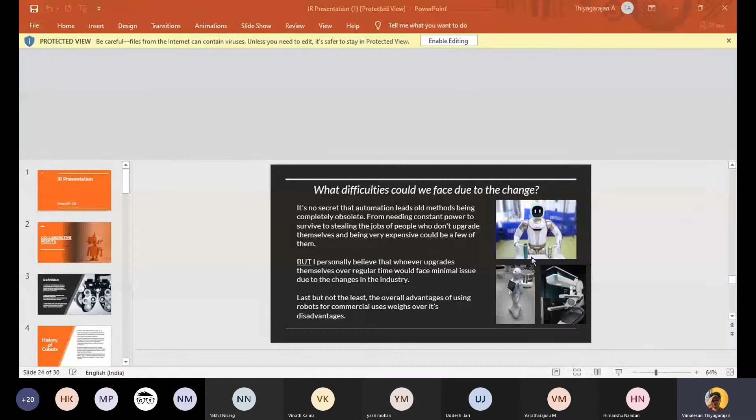Yes, Vimalesan. Give enable editing and then give your file.

Good morning, sir, and my dear friends. We are Group Wealth. We are presenting upon robot technologies and applications, and the topics we selected are as follows.

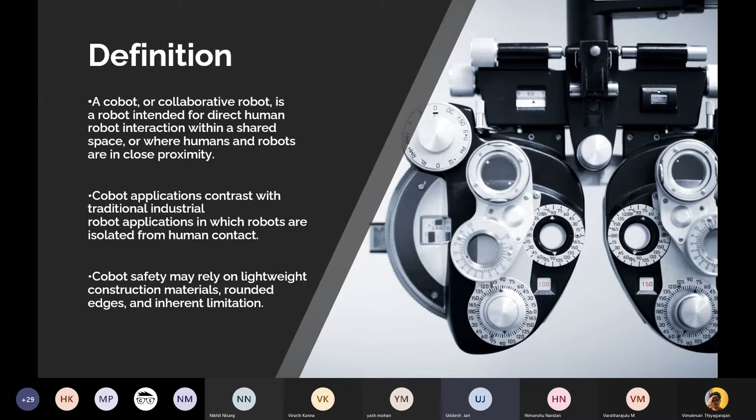Next slide, history of cobots. Cobots were invented in 1996 by J. Edward Colgate and Michael Peshkin, professors at Northwestern University. Their 1997 US patent entitled 'Cobots' described an apparatus and method for direct physical interaction between a person and a general purpose manipulator controlled by a computer.

The invention resulted from a 1994 General Motors initiative led by Prasad Akella of the GM Robotics Center, and a 1995 General Motors Foundation research grant intended to find a way to make robots or robot-like equipment safe enough to team with people.

There are four types of collaboration possible between robots and humans in industrial settings. The International Federation of Robotics defines four levels of collaboration between them. First, coexistence: human and robot work alongside each other without a fence but with no shared workspace.

Second, sequential collaboration: human and robot are active in a shared workspace but their motions are sequential, they do not work on a part at the same time. Third, cooperation: robot and human work on the same part at the same time, with both in motion simultaneously. Fourth, responsive collaboration: the robot responds in real time to the movement of human workers.

Next slide. Now coming to the applications of collaborative robots, I have taken two fields and a third as other applications. The first field is medical, with four broad applications: radiation surgery, angiography, hippotherapy, and particle therapy. In the entertainment field we have riding systems, 9D movies, motion pictures, and direction based on cobots. Other applications include biological cybernetic research, wearable robots, and military cobots.

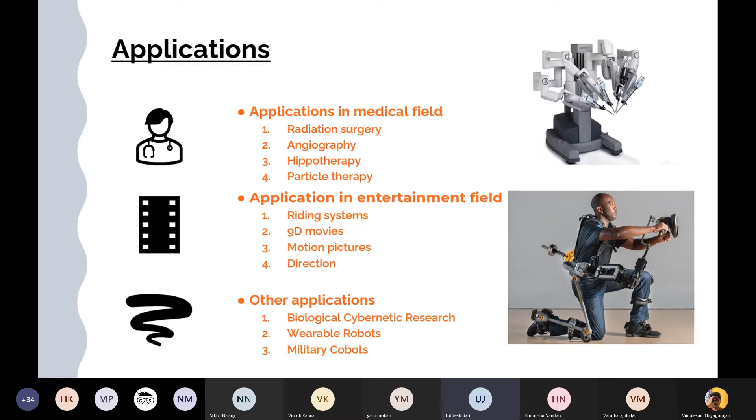Coming to its advantages and disadvantages. Advantages of cobots: they are more adaptable, they can adapt anywhere, they are more productive, giving more output in the same amount of time. Cobots are safer, more intuitive, more user friendly and intelligent, and most importantly, more affordable and cost friendly. Cobots have the ability to work around the clock, handling heavy loads, toxic substances, and repetitive tasks continuously.

Now coming to disadvantages: high standards of maintenance are required. Second, precise programming is needed, requiring extensive time, training, and specialty knowledge. When the computer fails, it causes a breakdown. Fourth, new products require reprogramming, which takes a lot of time. Fifth, people lose jobs because they are replaced by robots in the new era. Sixth, there are supply of power issues. Thank you.

I would hand over to Vimalesan to talk about self-healing robots.

Oh, Vimalesan, you're mute. Vimal. Am I audible now? Yeah, you are on. Yes, yes, I think it's echoing. Okay.

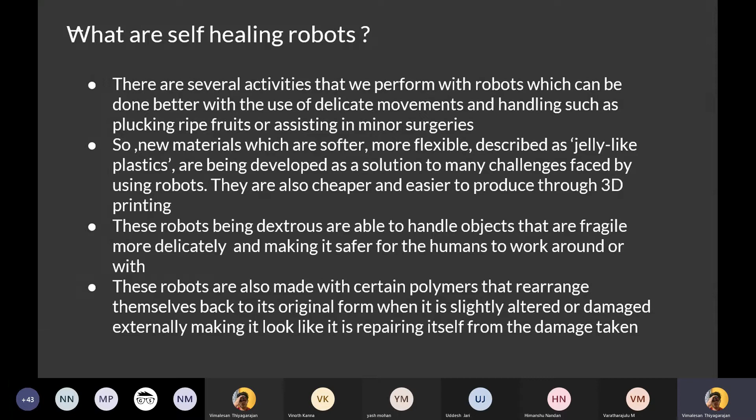So why should we use these robots? First, they help reduce the need for time-consuming, complex, and expensive repairs because they heal themselves, and even if there is damage, it's easy to fix them through 3D printing. This also has implications for sustainability since you don't need to replace many parts, and maintenance is independent and autonomous. Self-repair mechanisms also mean they are less prone to human risk, that is, humans damaging them, because you don't have to worry about accidents in the workplace.

They are also extremely safe in workplaces with many robot workers and human workers. By developing more of these soft, safe materials, they can sense and locate damage and trigger the healing process without human interference. This is traditionally found in factories and labs, and will soon be moving towards environments like agriculture and the average household.

Xenobots are a type of self-healing robot that is recently being made. They are made with the help of stem cells taken from a frog. These are less than a millimeter wide, and they can travel inside our bodies like our blood vessels, and they can also walk and swim. In the top right, you can see an example. These have their own mass of cells that function on their own, and they also heal.

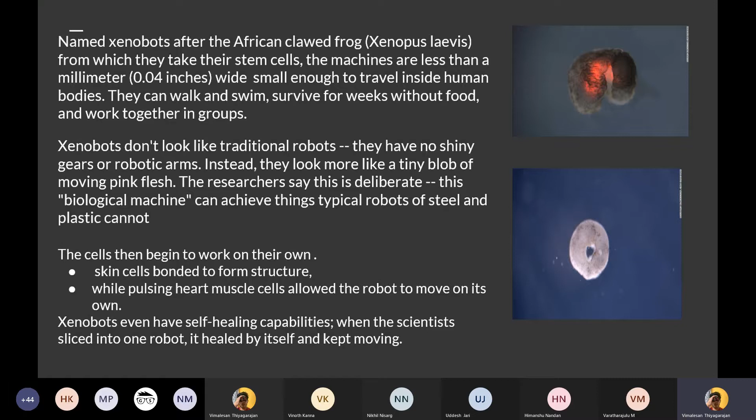These also have self-healing capabilities, in that when scientists cut the robot, it kept healing itself and moving. With this, my topic is over.

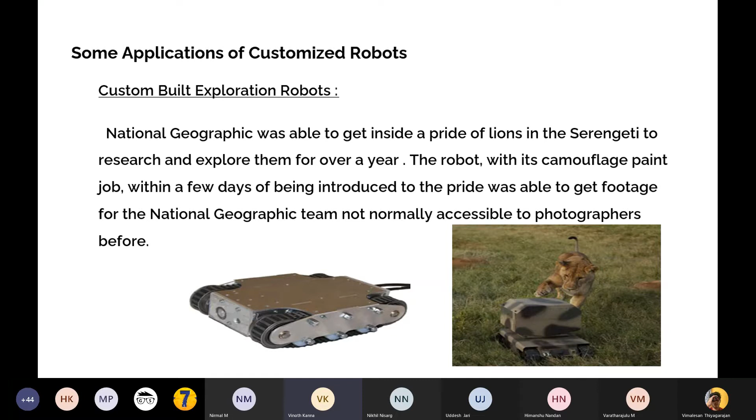Here's an application of customized robots: a custom-built exploration robot. National Geographic was able to get inside a pride of lions in the Serengeti to research and explore them for over a year. The robot, with its camouflage paint job, within a few days of being introduced to a pride, was able to get footage for the National Geographic team not normally accessible to photographers before. Next slide.

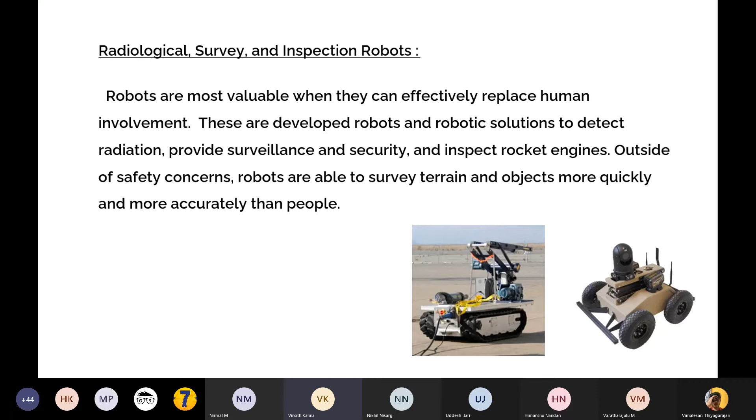Next, radiological survey and inspection robots. Robots are most valuable when they can effectively replace human involvement. These developed robots and robotic solutions detect radiation, provide surveillance and security, and inspect rocket engines. Outside of safety concerns, robots are able to survey terrain and other objects more quickly and accurately than people. Next slide.

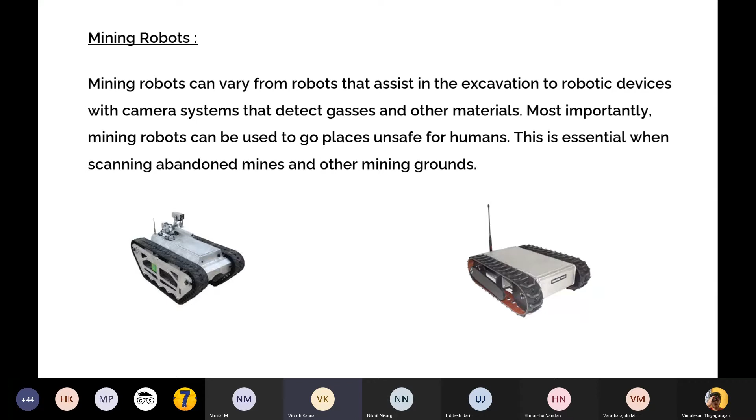Mining robots vary from robots that assist in excavation to robotic devices with camera systems that detect gases and other materials. Most importantly, mining robots can be used to go places unsafe for humans. This is essential when scanning abandoned mines and other mining grounds.

Next, the last application is public safety and homeland security. Standard tactical surveillance robots are routinely used by police, fire, security, SWAT, HAZMAT, etc.. We can customize these robots to suit specific needs if we require a special manipulator, HAZMAT sensor, size, weight, or any other feature — it can be specialized through customization. Thank you, sir, over to the next speaker.

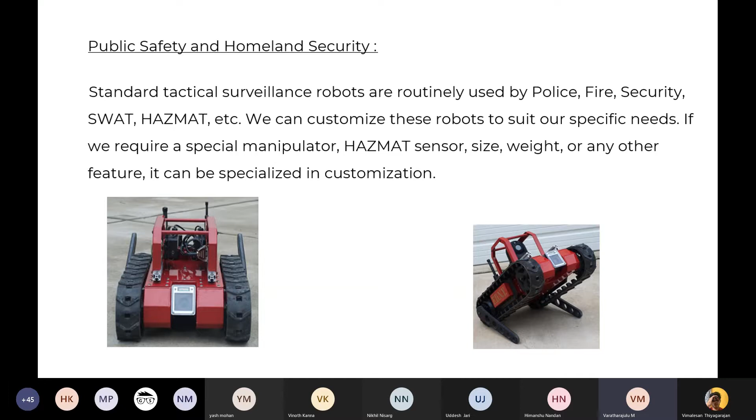Yes sir, so my topic is commercial robots. Can you go to the next slide, please?

As the name suggests, these are used in commercial applications wherever there is buying and selling of goods and services. There are various applications of commercial robots, from being a waiter in a Japanese cafe to being an autonomous guided vehicle. So why are these commercial robots used? Experts say that previously robots were only used in assembly lines, but now they are slowly moving away from assembly lines into our daily lives. With the help of artificial intelligence and automated vision, robots can now work alongside humans in the same workspace.

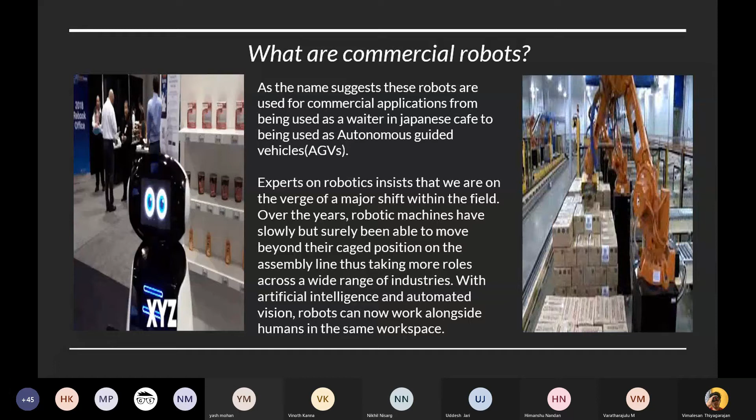Can you go to the next slide, please? So where are commercial robots used? Commercial robots are used in delivering retail products to customers, as we would have heard about the Amazon delivery system which is now using drones. Those are automated drones; they do not need any human interference. It could also be used in mapping activities such as exploring a cave, and perform medical procedures. Right now it's not being used extensively, but in future it's obvious that it will be used a lot more and will help in many ways.

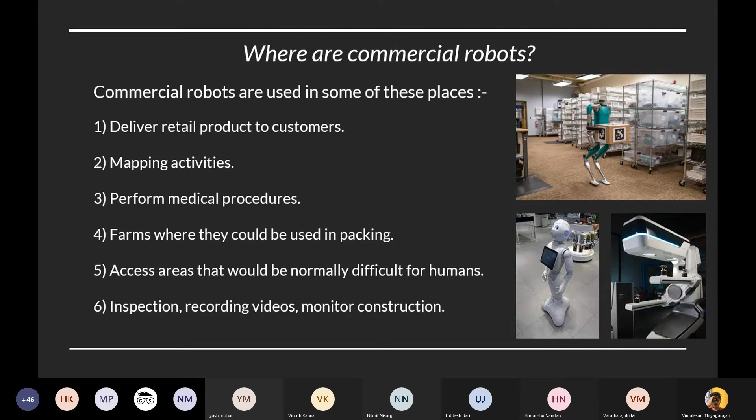It could also be used in packing in farms. If you guys have seen videos on TV or the internet, not in India but other places, it is heavily used and it actually increases productivity by a lot. Even big countries like India cannot compete with small countries like Sweden because of the involvement of commercial robots in their packaging systems. It would also help in accessing areas that would normally be difficult for humans - for example, soft robots made of plastic can go into areas with different curves or very small spaces where we cannot go. And it can obviously be used, as told previously by my friend, in inspection, recording videos, and monitoring construction of places. Can we go to the next slide, please?

So what about the future? Commercial robots have a great future according to me, and it's likely that within a decade we'll see them present in our homes also - at least for us, we are the creamy layer, that's why I'm saying that. Other applications I could think of are marketing, entertainment, telecommunications, home appliances, and medical procedures.

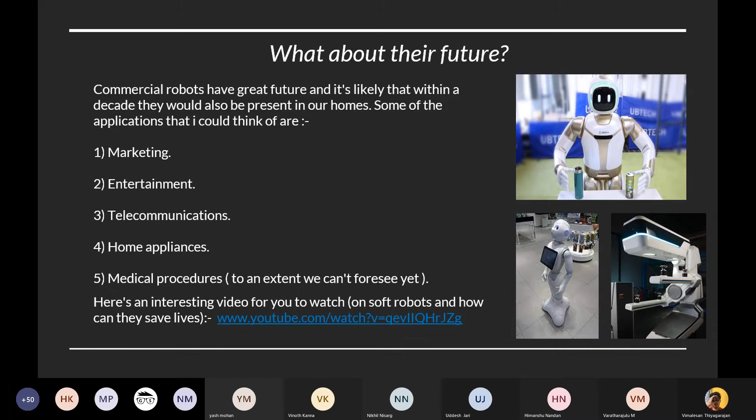I would like to talk about telecommunications. I recently heard about one such device that they have used to detect heart attacks and send the signal to the required department, and they will directly send an ambulance within minutes to the patient, so there would be no serious issues because of that. I also recently saw an interesting video - I've posted the link here. When I share the PPT, you guys can watch it. I'll definitely recommend you watch this, it's very interesting, and this page is also very good.

Can we go to the next slide please? So what difficulties could we face due to the change in the industry caused by commercial robots? Now, as we know, advantages are many - as my friends have spoken, advantages are almost the same for all robots. But the difficulties we might face in this industry change can include needing constant power to run these robots, and they steal the jobs of people who don't upgrade and adapt themselves for the future. These are also expensive. But I personally feel that whoever upgrades and adapts to the changes will face minimal issues due to the change in the industry. Last but not least, the overall advantages of using robots for commercial uses outweigh its disadvantages, so it is definitely recommended.

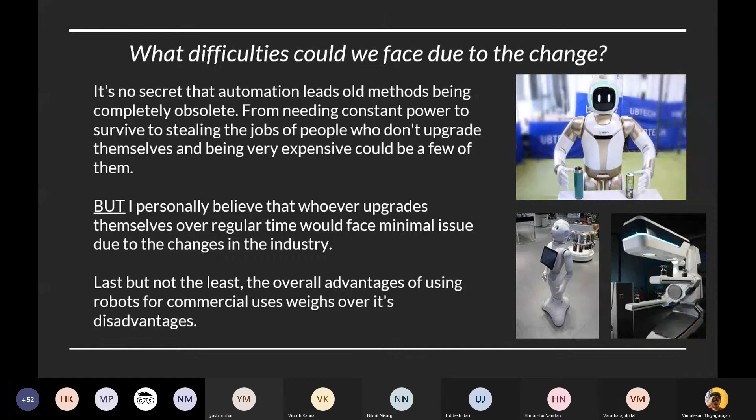Hello, am I audible? Yes, yes, Yuvaraja. Okay, good morning sir and friends. Today I'm going to be presenting a brief idea on cloud robotics.

Before I get into the main topic, I will give a precursor on the topic of cloud computing itself, which is the basis. Next slide please. So cloud computing by definition is the on-demand availability of computer system resources such as data storage, computing power, etc, taken care of without any direct active management by any user. What this allows us to do is use hardware and software not of physical devices, but rendered as a service via platform. Where exactly the computation occurs is not necessary as long as the end result is obtained. The simplest example I can give for this would be Google - whenever we search something, there is no one specific computer processing that query; a lot of systems combined together process this query and send back the result. This is one of the simplest examples of cloud computing.

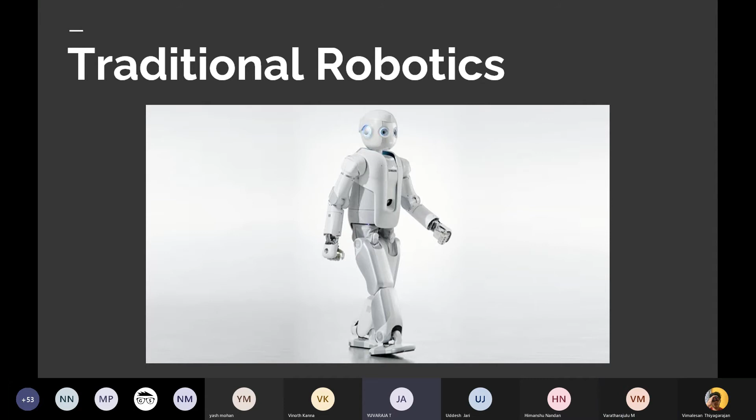Now let's have a look at traditional robotics. Take the humanoid robot in this picture, for example. Every task related to this robot, like moving a foot, grasping an object, or recognizing a face with its sensors, requires a significant amount of processing and pre-programmed information. As a result, sophisticated robots and systems like these need to carry powerful computers and large batteries to power them.

This is where cloud robotics comes in. You're combining the advantages of cloud computing and applying it to traditional robotics. Cloud computing and cloud storage provide a single platform that provides services for these robots. When connected to the cloud, robots have access to the benefits of a data center, including data analytics, storage, and software as a service. This allows robots to offload query processing to the cloud. The connected cloud also ensures any other tasks can be added in real time. Monitoring and managing the robots is also now much easier, as all the machines are connected to one central cloud at all times.

Now let's look at the benefits of cloud robotics. The first one is cost-effective and efficient robots. Cloud robotics allows us to build robots that no longer need to carry heavy, process-demanding computers around to compute the tasks at hand. All the processing can be done over the cloud, and the output can just be fed to the robot via an expanded network. This allows us to build more power-efficient and cost-effective robots.

The second point is faster deployment. What I mean by that is in cases of warehouse management, where we use AGVs, etc. Setting up these AGVs is quite cumbersome, as it can require up to weeks of setup time and very specialized equipment. With cloud robotics, we can just deploy robots connected via the cloud. This process has to be done only once, and it can be done within hours. This allows us to get an AGV warehouse management system set up and running within a day, whereas usually it would require up to a week.